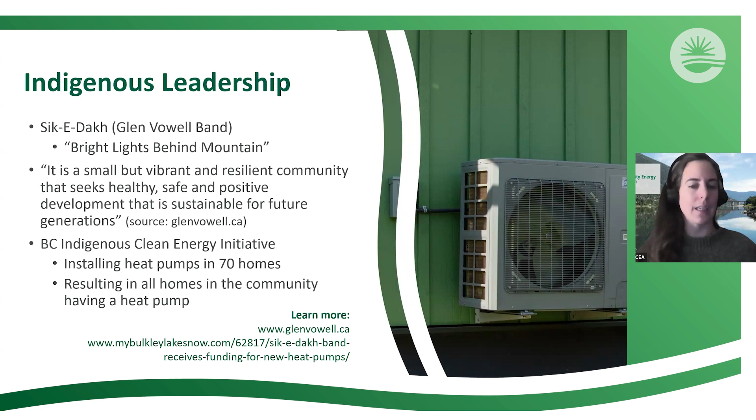The Sik-E-Dakh Band, also known as the Glen Vowell Band, received $300,000 in funding through the BC Indigenous Clean Energy Initiative to help improve the community's energy efficiency. They're using this funding to install heat pumps in 70 community homes, and with the completion of these installs, all 75 homes in the community will have a heat pump. If you'd like to learn more, you'll see at the bottom of the slide there a couple of different links that you can go to and read more about the project.

All right, for those of you who are joining us for the first time, welcome. The Community Energy Association, CEA, is a registered charity and nonprofit. We're committed to advancing bold climate and energy action by local government and Indigenous communities. We're proud to be the only nonprofit in BC dedicated exclusively to supporting these communities in their efforts to tackle climate and energy challenges. CEA recognizes that the built environment is a significant contributor to community greenhouse gas emissions. By addressing this sector, we can achieve meaningful emission reductions, strengthen community resilience and energy security, and enhance the comfort, health, and safety of our homes.

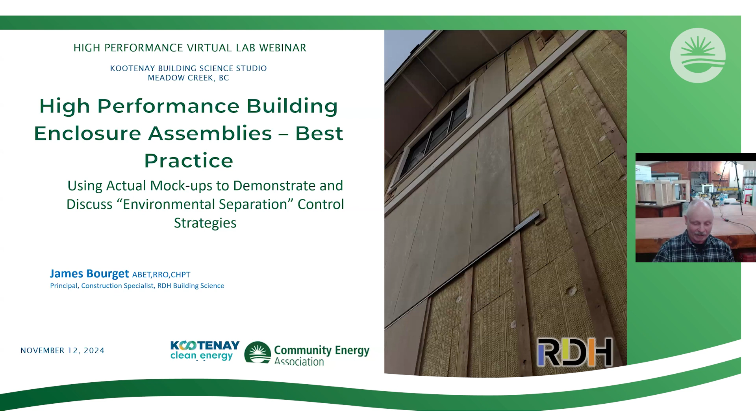Material being used for reference, continuing education and training purposes only. You need to make your own site-specific decisions and follow laws, codes, and regulations, etc. This is legalese blurb I have to put in front of the slides - you can read that. Seeing it here doesn't mean you go and do it. It means you could do it, but you need to know each site's own conditions.

This is going to talk about building science and the fundamentals. The agenda for today: I'm going to do a quick recap on building science fundamentals for those who did not come to part 1 - for those that came, it's just a refresher, and I'll breeze through it, kept it very light and simple. Then I'll talk about some environmental loads, mock-ups. We didn't get through the slides on below grade in part 1, so I'm going to blast through them. I went through the physical review of it, so this will be a nice recap, I believe.

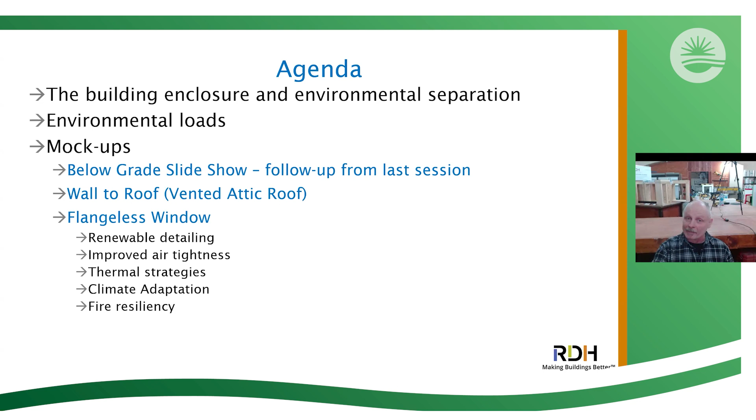Then I'm going to look at a wall-to-roof transition with a vented attic roof, using an exterior air barrier approach. How do you transfer the exterior air barrier to the attic when the air barrier in the attic is actually the vapor barrier - the poly - so it's air barrier by default? It's kind of a red herring and a bit of a problem. I'm going to show you unique ways of addressing that, quite simple. Then we're going to look at a flangeless window installation, high performance, no flanges - as we move forward, that'll be the way the industry is going to go. With all of these you get various renewable detailing aspects, improved air tightness, thermal strategies, climate adaptation, fire resiliency - all these things fall into place because we're going to start putting things in the proper location.

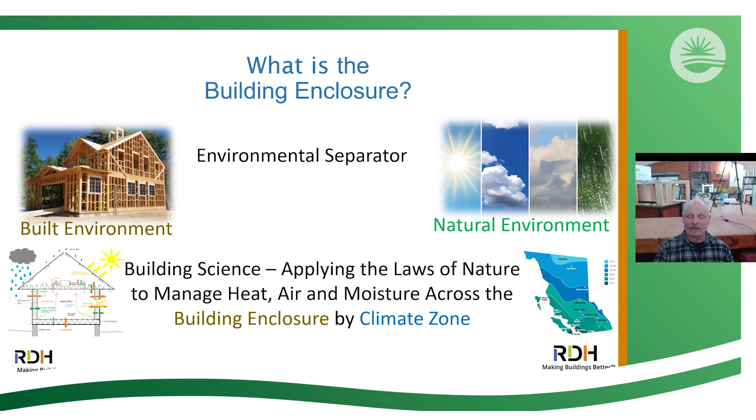So what is a building enclosure? It's an environmental separator - it separates the built environment, where you are, from the natural environment. Building science applies the laws of nature to manage heat, air, and moisture across the building enclosure, here by climate zone in our province, and we have different climate zones and different requirements. Here's a look at the climate zone map for British Columbia - you can see there are different environments, varying exterior environments, and you need to build accordingly. So the building enclosure just separates the inside from the outside.

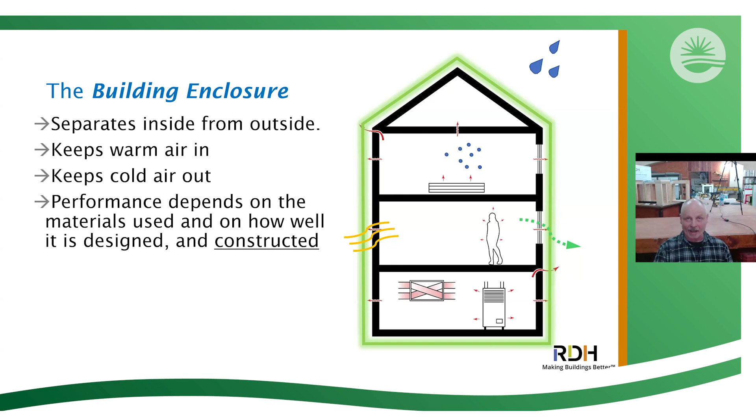It's really that simple - it keeps warm air in, keeps cold air out, or vice versa depending on summer or winter. But it really depends on how it's designed and how it's constructed. What we've done in the past is not necessarily suitable for the future.

Environmental loads are 5 critical barriers. The air barrier has a direct or indirect relationship with all the environmental loads. It's kind of like the king of the critical barriers, very important. Thermal has a relationship with 3 out of 4. Vapor deals with vapor, water deals with water. So at the end of the day, get the air tightness, then work on your thermal, then do your mechanical. Envelope first.

Traditional wall assembly here, you can see that there's a little bit of insulation on the outside, keeping the sheathing warm, but the vapor barrier goes on the warm side of the insulation, full stop, that's it. But it can also be the air barrier. In the past, we've been taping a poly and making it the air barrier by default. That's the only reason you tape the polys, because you're using it as an air barrier. If it's vapor barrier only, you do not need to tape your poly.

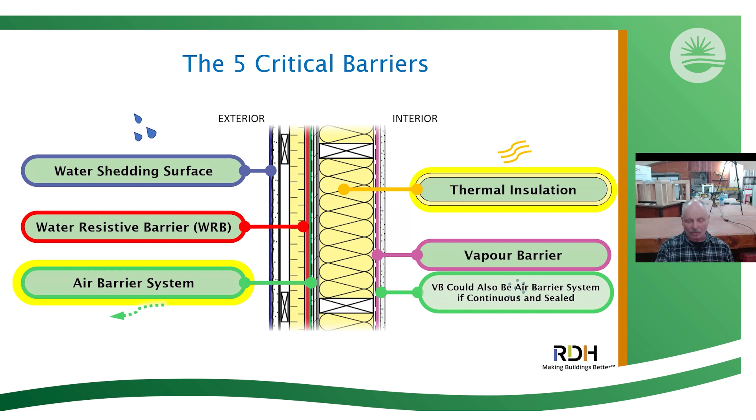It's a function of area covered. 95% covered, 95% effective. 100% covered, 100% effective. Vapor drive is one-dimensional. Air leakage is three-dimensional. Hence taping of an air barrier.

I look at nature, we should look at nature. Thermal performance by resilience in nature. Nature has a handle on all the climate zones. So how does nature stay warmer and how does your body stay warmer? Well, I asked everybody in the forest and they said, well, we kind of got this little inner layer of fat, subcutaneous layer, and some skin and some fur.

So we put some controls on the outside. I asked Buddy, he said, hell, it's cold out, I'll buy a ski jacket. That's it. Put the controls on the outside. You think to yourself, well, you put all the controls on the outside, how should your home stay warmer? It's organic, animals, humans, we're organic. How do you separate them? So from the inside, the outside, or both?

Well, this is off my property. There's a big black bear there, and he's walking up towards me, and I'm sitting there thinking about this wall. And my next class, and he says, well, what are you thinking? I said, well, I'm looking at this wall, and I'm thinking that if I took that insulation and it was like the subcutaneous layer of fat under the skin, and I took the plywood, which is the skin of the house, and I considered it the skin like on animals and humans and everything. Then I take the outside, the thermal and the cladding, and that'd be like the outside fur.

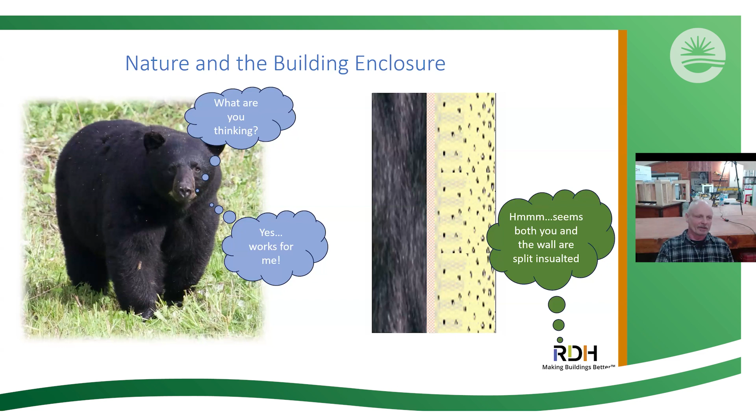It seems both you and the wall are split insulated. Well, that's right, and yeah, it works for me. And I make this tongue in cheek because the answers are so glaringly obvious. Stuffing a wall is habits of the past. Don't apply to the future, don't apply to high performance, not effectively, not without risk. If you build and follow the guide led by nature, you can build without risk, for assemblies that are highly durable with no failure mechanism.

More to that point, more interior insulation means colder sheathing. Colder sheathing means higher condensation risk. Means you need to have the ability to dry out. Many climate zones don't have rain screens, so how does it dry out? It's kind of like a snowball of trouble, and so we hope it works out. Hope's not a good play.

You look at the climate zones, you go up, it's just a little graphic to get your head wrapped around a little bit, saying, oh my. So the colder it gets in the climate zone, the colder the sheathing gets, the higher the condensation potential. Condensation from what? Well, from air leakage. Air leakage is never zero. And if it touches cold sheathing, that sheathing will be below dew point for your interior air. So it's going to get wet and damp. And can it dry out? Maybe. Is that the best way to build? No, I don't think so.

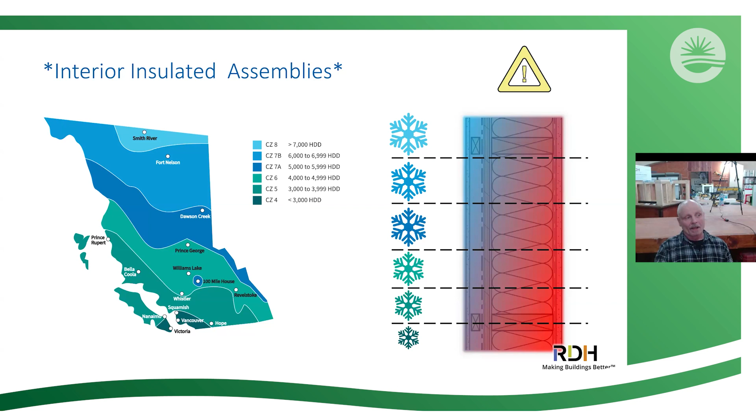Vinyl's a big barrier. You've got a big barrier on the inside and a big barrier on the outside. It's just a potential for issues. This is happening, and the problem with buildings is they fail over time, not right away. So people say, well, I never see a problem. Well, I do.

More exterior insulation means warmer sheathing. Think of it this way: summertime you wear a t-shirt, fall you wear a sweater, wintertime a jacket. As conditions change outside, you just put on a sweater, and the more fat of the sweater, the warmer you are. The skin is the plywood of a home. So the plywood's warm, and any air leakage or moisture won't condense because it's warm.

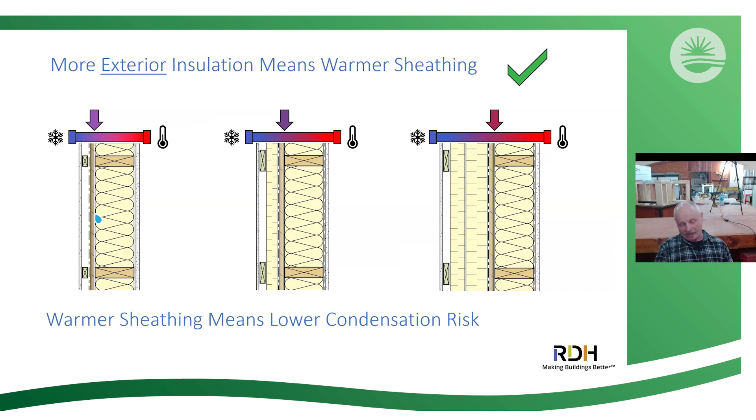To that point, if you take a -10 design temperature, like somewhere down on the coast, and apply no exterior insulation, just bats, the sheathing's sitting somewhere, and at -10 it's going to be really cold. So it's below dew point. Dew point for interior environments could be somewhere between 4 and 9 degrees, in the average range of human comfort per ASHRAE, which is 18 to 27 degrees and 30 to 55% humidity. But in that zone, 4 to 9 is a fair assumption.

So I put 1 inch on the outside. It warms up the sheathing, but it's still a bit light. I put 2 inches on the outside, now I'm sitting around 5.5 degrees. That's pretty good, but it depends on my interior environment—I could still get condensation.

Depending on the type of insulation I put there, I'd like it to be vapor open so that if I do get some wetting, it'll dry out. What if I put 4 inches on? Well, all of a sudden my chance of condensation in that sheathing is virtually zero. I have a wonderfully resilient wall assembly that's fire resistant, water penetration resistant, and has increased airtightness. All these wonderful things happen because we're starting to put the controls on the right side, like nature.

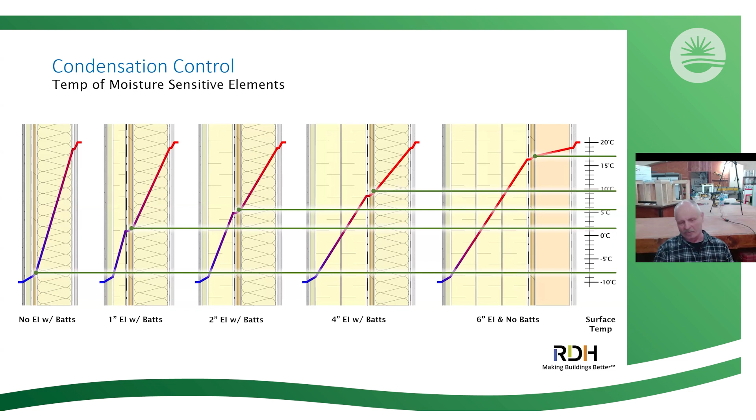Now, if I put all the insulation on the outside, the plywood's inside the building. You can go look at furniture from the 14th century at the museum because it's inside the building—well, your building is now inside the building. There's no failure mechanism for your wood frame. Everything you do going backwards from there increases your risk, to the point where we've been stuffing walls, and that's the most high-risk assembly you can build.

The below-grade air barriers—we talked about this and didn't get through the slides. What we typically use is sealed polyethylene over insulation, or if you've got radon, then you've got the radon mitigation underneath with airflow and different mitigation systems. But regardless, that's a typical approach below grade.

Some below-grade considerations we're going to look at: continuity of the controls. Thermal mass is a big one. You put the insulation on the outside, and all that concrete below grade is going to absorb heat. The insulation outside of that holds the heat into the concrete, and when you dial down the heat in the room, it gives it back to the room. It's a pretty simple concept, but we put poly and bat insulation on the inboard side and disregard that thermal mass. That'd be like building a fireplace or a barbecue and not putting any thermal mass around it—kind of silly.

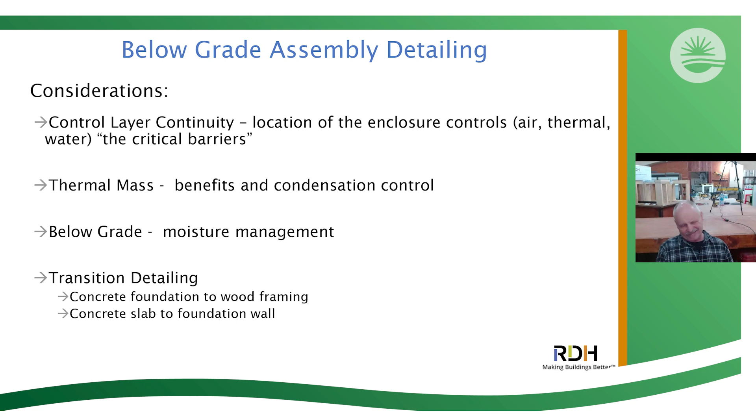We'll look at some transition detailing. This is the below-grade assembly mock-up. I didn't take you through the slides yet, so I'll go through them now since we've already talked about it. There's a waterproofing or damp-proofing required, that's on the concrete. Each sentence will be followed by a green arrow so you can follow along—that's how I set this up for you.

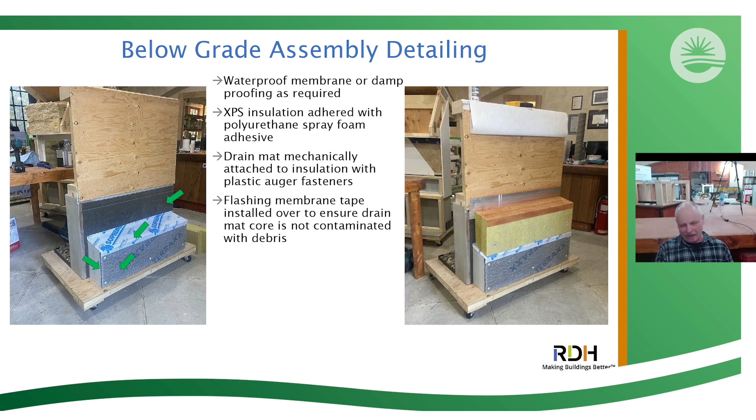XPS adhered with polyurethane spray foam, so you can glue that to the membrane—that's quite common, right there. Drain mat mechanically attached, right there, attached right to the foam, and I'll explain that in the next slide. Flashing membrane tape over the drain mat ensures its core is not contaminated by debris behind it, and the rest. So you can see that that's working.

I've got a self-adhered membrane transition from below grade to above grade, where the concrete turns into framing. So I have a self-adhered membrane connecting the concrete to the framing, and then I transfer the exterior air barrier into that concept.

Below grade mineral wool, this is a fire rated assembly. I have simulated 2 feet of mineral wool below grade because I've seen on burnt sites where people have lost homes and cabins because the ground actually drops significantly when the biomass becomes a peat fire. So you're protected for 2 feet below grade also. Then the XPS starts down below that.

Prime the mineral wool. You can use an aerosolized peel stick primer, spray the mineral wool, and it becomes hard and crunchy and easy to put membrane on. Otherwise, it's like putting Scotch tape on a cat - it doesn't stick so good, it's all fuzzy and it doesn't work. Now it works fine. So this is how I stick on the insulation.

I can also adhere the mineral wool this way - same kind of thing for roofing, adhered roofing systems. Well, this is just a vertical wall, adhered wall system. So I use a polyurethane spray foam adhesive.

Drain mat, you can buy drain mat augers. They screw right into the insulation and hold extremely well. You can use a rock slinger, backfill, do whatever you want. It makes a wonderful drain mat attachment.

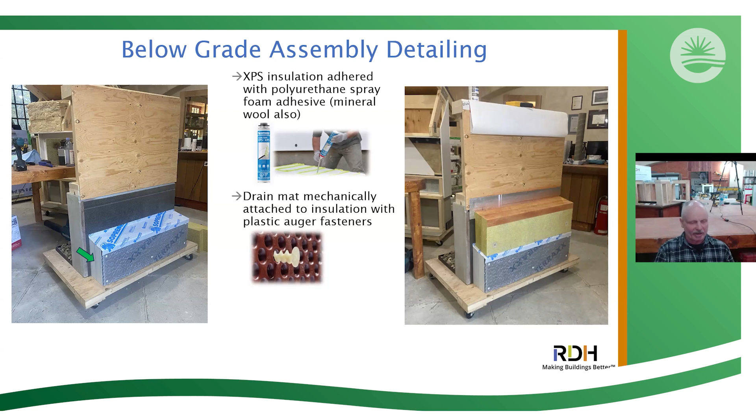And then primer, I just spray the Elastocol primer on there and it becomes crunchy, or it could be a Henry's primer. I don't care whose primer it is for the peel stick you're using.

So the below grade assembly detailing, flashing membrane tape installed - this is to direct moisture out of the assembly. That's part of the code requirement, that if water can get to the structure, you need a means to dissipate it to the exterior. I'll tell you right now, when you exterior insulate, no water's getting to the structure. However, we have to follow along for the time being because the requirements and the building code are not perfectly harmonious at this time. I could share some stories of testing, but in the meantime, it's simple enough to follow along.

So the sheathing membrane laps over and is taped to the self-adhered membrane, right here - it's shingled. That's what's required in the building code, that it be shingled at least 50 millimeters, 2 inches. Okay, that's what we've done, so water would drain outward.

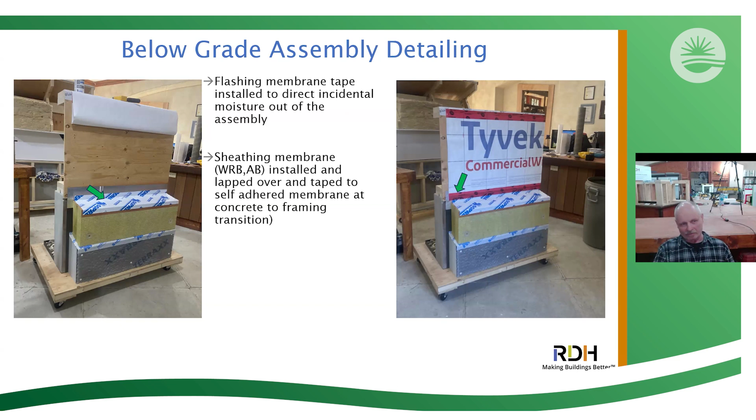That's nice. So now here I've got an EPDM gasket for an electrical box I threw in a wall for fun, sitting right here. That's the electrical penetration detailing.

The funny thing about electrical boxes is they're 2 inches, well, rain screen is 3/4 and cladding is usually 1.5 inches, so I need to recess the box 1/2 inch. I simply trace the box on the insulation, take the plug out, slice a 1/2 inch off it, put the plug back in, and put a little plywood plate that screws into the wall assembly. Then I attach the box to that plywood receiver, and the plywood receiver terminates a 1/2 inch shy of the finished plane of the insulation - you can see it fits the box perfectly.

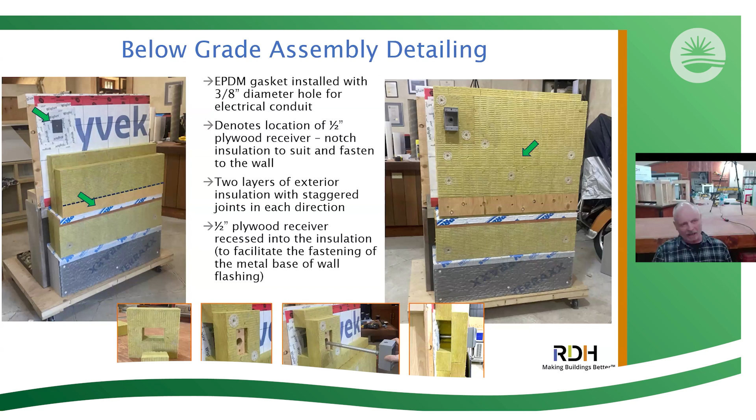So that's a 1/2 inch notch in the insulation to receive a plywood receiver, seen on the right-hand side, with 2 layers of staggered insulation in each direction, and a 1/2 inch plywood receiver. The receiver is there because you've got flashings and metals - it's very challenging to fasten the back leg of metal through the insulation. You can't put the metal on the plywood because then you've got a thermal bridge, and if you fasten through the insulation, you're going through the air barrier. Many times you have to make adjustments, but you can't take those screws out. So if you put a receiver plywood fastened through the air barrier, you make the compression seal and it never comes off - it stays. Now you can play games with your flashing with short screws that never penetrate the air barrier.

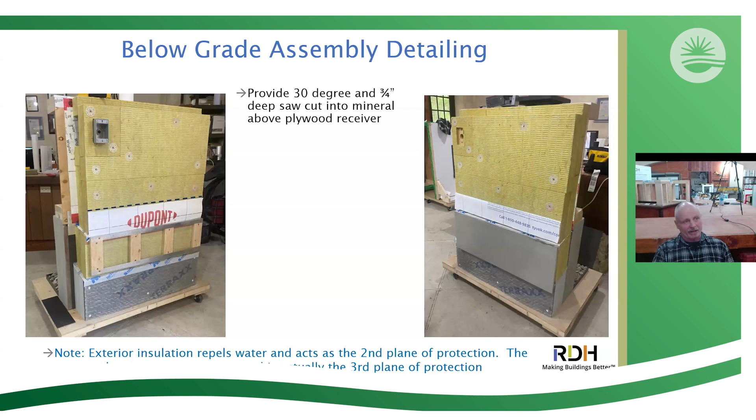So here I ran my cordless Skil saw along the plywood, I cut a 30-degree, 3/4 inch deep cut in the mineral wool above the plywood, right there. I installed sheathing membrane and tucked it into that saw cut, so it's shingled. One of the things you have to understand is this mineral wool is hydrophobic.

Water will run down, so now it just runs off. I just tucked it inside there. Very simple to do—just different ways of looking at things.

3/4 by 3 inch PT strapping installed for the cement board base right here. Cement board or parging installed here. It could be parged after, whatever.

Now you get to this point here. You've got a base wall flashing. You see the base wall flashing has a little cut right here, right? Well, that tucks into that reglet right here, just like the Tyvek did. So it becomes a shingle.

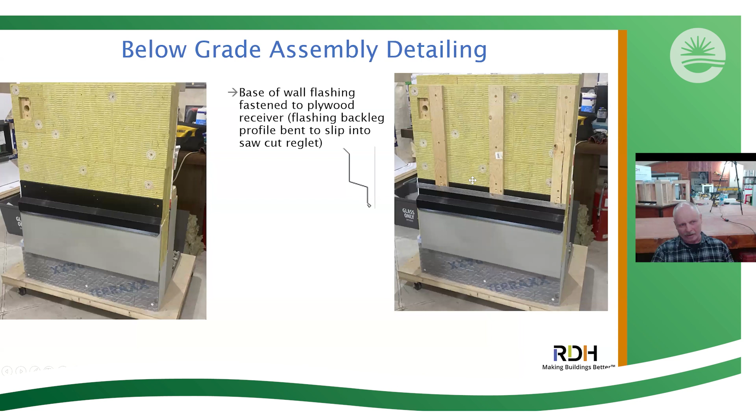This is incredibly simple to do and highly effective. I can pour water here all day long and no water will ever get behind anything. And so now I've got that done right there. Install perforated metal insect screening strapping right here.

So cladding installed, electrical trim. There's the electrical box that we had that was set into insulation. I have a trim that's got a notch in the backside to slip the Hardie in behind. It's completely serviceable—I can remove the trim, I can remove the box, I can do whatever I want with that electrical.

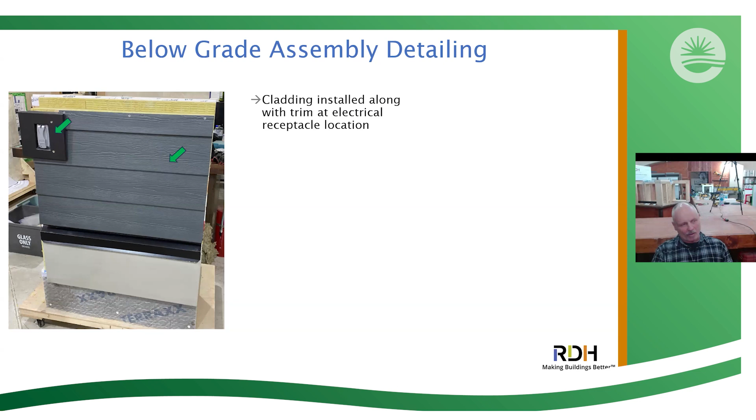Look at behind there. So here's a below-grade detailing. I'm looking from the backside. I say, okay, well, I got some batt insulation. Yeah, that's cool.

Remember, I got insulation on the front side of the concrete. I also got insulation on the front side of the wall and inside the wall. I got a structural tie-down shown right here. These are Simpson tension tie-downs. You attach it into a double stud. Quite simple to do and doesn't interfere.

One of the things we see is typical tie-down straps that are not conducive to exterior air barrier applications. And shazam—you look at this and go, what the heck, what am I supposed to do with this? Okay, it doesn't work. You can do tie-downs—I've done numerous buildings just using tie-downs. Unfortunately, the industry and structural engineering has this wonderful cookie-cutter approach that gives them the answer for how many of these tie-downs or strap tie-downs you can get. Well, ask them to figure out how many tension ties so that you have uninterrupted ability to put an exterior air barrier onto your building.

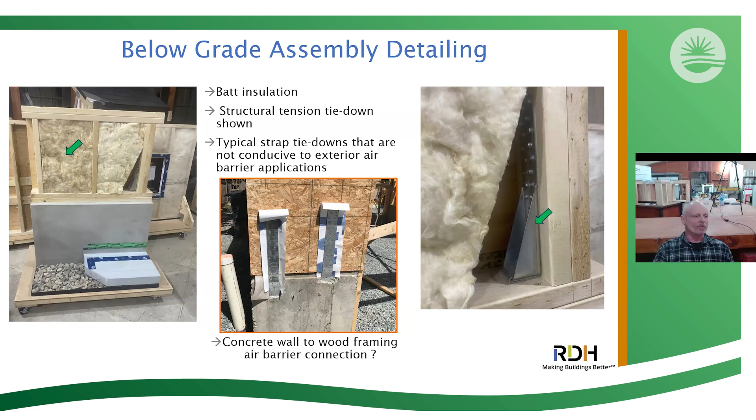Okay, concrete wall to wood framing air barrier connection? I don't think so. All right, so you look at the inside here, the XPS insulation with poly.

Right there, that's what we're going to talk about. So I got a poly pre-strip. I use plate poly around the perimeter of a garage or basement or whatever it might be. I do the perimeter and then I put a piece in the field. It's really hard to figure out the rebates and everything and put all this poly in and make it nice, but it's easy to strip it and put it back on top. It is part of your air barrier system.

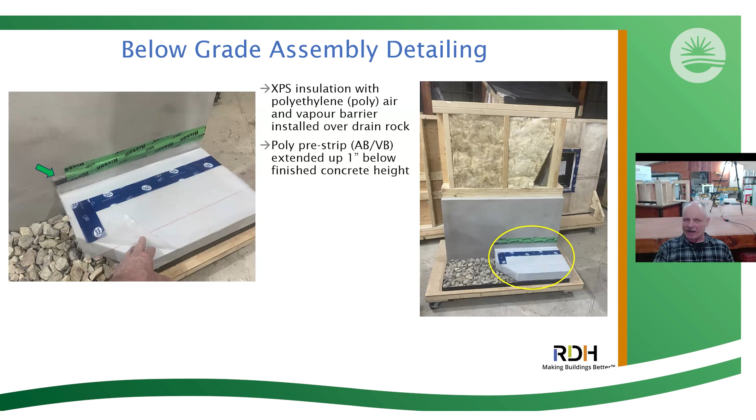So I'm going to pre-strip the poly, extend 1 inch below the finished concrete height. So I know where the concrete goes, I can snap a line there—that's where the concrete is. I'll bring the poly up to 1 inch within that line. And there's a reason for that.

So I'm going to set the poly in the acoustic seal, and I'm going to put that 1 inch below onto the poly right there. Then I'm going to install high performance air seal tape onto the concrete foundation and terminate at the height of the finished concrete pour. That's right here.

So you already snapped the line, you know where it was—you put the tape there. Before all of this takes place, you power wash the concrete into the gravel and do your work. This tape bonds—now bring your best fingernail to the party, okay? You can't get it off. The best part is that when you pour the concrete, you don't interfere with any of the air barrier because that's the height of the concrete.

So here's the poly field sheet, right here. And that's taped to the pre-strip—that's the blue tape, okay? And so you can see the red line indicating the extent of the pre-strip. I taped the field onto it.

So below-grade assembly, I got poly with gypsum right here, typical inside condition. I got concrete slab poured to the height of the air seal tape. So you can see on the right-hand side, concrete's poured to the height of the air seal tape. So when you're troweling it, you're not cutting any air seal or connection to the concrete, but you're transferring that air barrier right through the concrete to the membrane or damp proofing that's on the outside and up the outside of the building, okay?

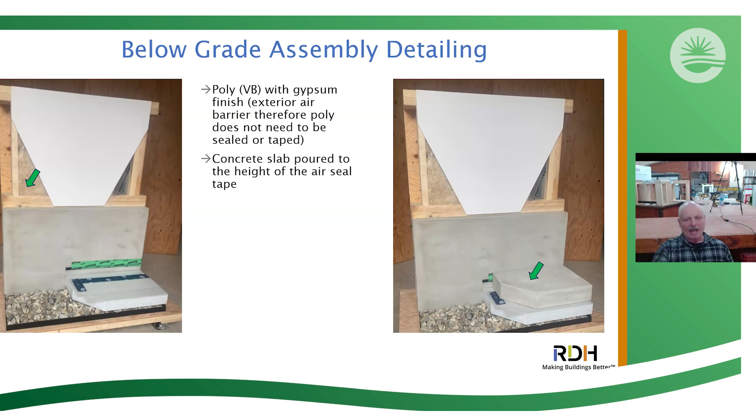So sometimes you got ICF. You can extend the poly onto the shoulder, and carry it through the concrete and up the front side of the waterproofing. That's one strategy you could do.

If you have the slab higher up and you can't go down the shoulder, because that doesn't really work, you can bring it up this way, put a vapor-open membrane on the foam on the inside so that water in the concrete can still dry out to the interior, depending on what membrane you have to the exterior, above grade. But you can make your air connection at the top of the ICF if you change to wood frame.

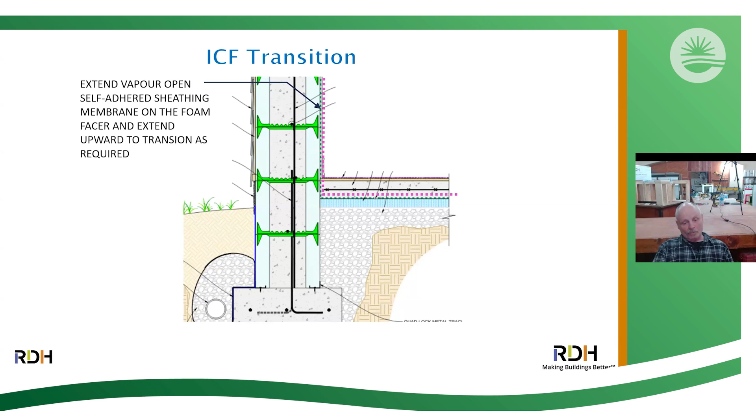So that was the below grade. I wanted to catch up with you on that, I know we looked at that last time. We did have a couple questions come through there, James.

Someone just asked for your thoughts on spray foam in unvented roof space. Spray foam in unvented roof space, you mean on the underside of the sheathing, I trust. I find that, for one, it's a highly risky assembly.

I can tell you straight up that on many jobs I've looked at, one thing you have to understand: roofs leak. And if you have spray foam on the underside, you may not know it's leaking. Best thing you can do is know your roof's leaking. What I found on many projects is structural damage, because water is migrating into that upper framing and chords of your roof assembly, could be joists, whatever, and it rots. You don't even know it because it doesn't make its way through.

So I find that when I'm designing or have to do a project, I put my thermal control on the outside. I follow the cue given by nature. It just makes total sense, both for the laws of physics and the fact that everything is highly visible. The structure itself, with thermal controls on the outside, will survive roof leaks, etc. That's why it's okay if roof water comes through your light fixture, you know the roof's leaking. That's minor. Structural damage is a big ticket.

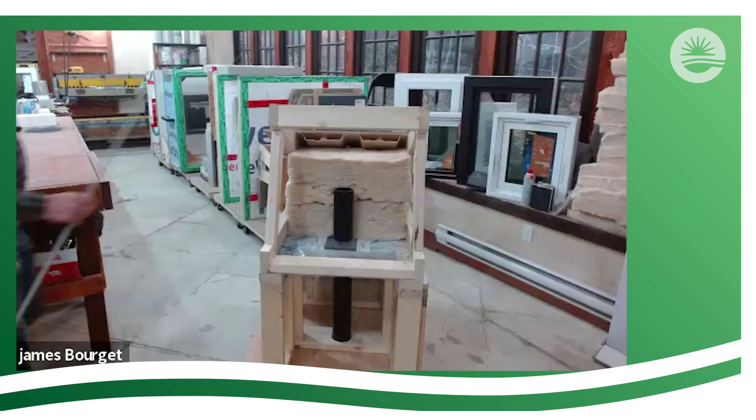I'm going to look at a roof to wall installation as built. So what I'm going to do is take you over and we're going to look at that mock-up, which is this one right here on the right-hand side. It's fully built, and I have that on camera right here. So I'm going to move on over there. This is the mock-up that you saw on that slide.

Which is a vented roof assembly right here, with the rain screen wall assembly. It's got Hardie cladding, 3/4 inch strapping, and 6 inches of mineral wool on the outside. Now, this is a 2x4 wall assembly. That's all you really need to build with.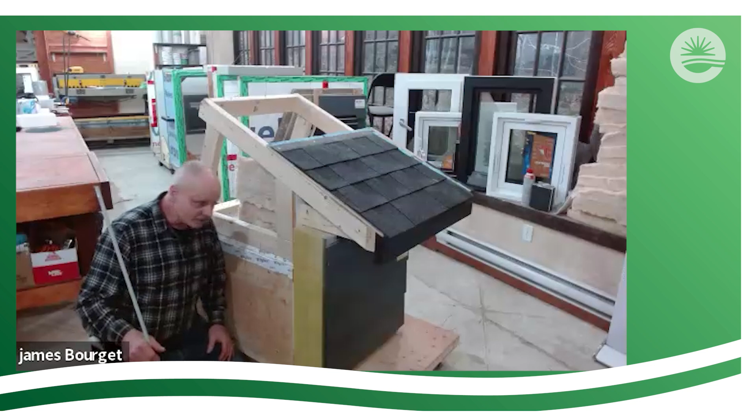A 2x6 was a function of the old R16, not so much a function of what you need to build generally. With 6 inches on the outside, I've got an R24 continuous insulation on the outside, another 10 on the inside, an R34, throw a couple air films and components in there, it's easily an R35 wall assembly. This would satisfy most climate zones and energy types. It's really quite simple.

A 2x4 wall, we know how to build them. 2 layers of mineral wool is quite simple to put on. I'm going to talk about that, and we're going to look at some of the air barrier strategies also. We're going to spin this around.

We'll talk about it for a moment. Then I've got some slides. Then I've got another mock-up here where the bottom half with the ceiling plane I have built, but I don't have the roof on it, so we can get a little bit more clarity taking place. You can see the insulation baffles and the rest of it in here. I'm going to take the insulation out. We get down to the ceiling plane.

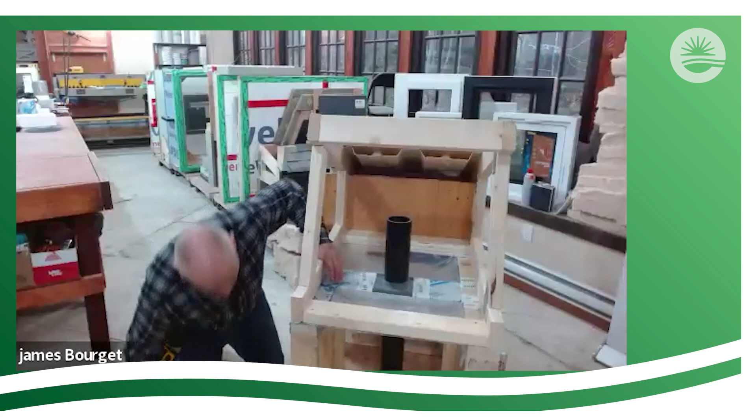And what we're talking about is on the wall itself, I have an exterior air barrier. You can see right here. This exterior air barrier carries up and travels across the plates this way. This piece of membrane hanging down here, that's a water-resistant barrier. It's simply there for water, not air.

The plane of the air transfer goes from the Tyvek to the plate, over to the polyethylene on the inside. Sorry, I have a problem here. Get rid of my phone, sorry.

So I talked about the air barrier, but here's where it connects to the poly on the inside. As you can see, the tape came across and transfers here. What do you think? There's a piece of tape right here and then some wood.

Well, wood is part of your air barrier. You can't blow air through a 2x4. You can't blow it through a 2x6, 2x10, 2x8, 2x nothing. So it can be used as part of your air barrier. If you seal the joints of the lumber, it can be part of your air barrier system. So what we've done is carried that across.

And you can look on the inboard side, which I'm going to take you in, and we'll switch over to a little mobile camera.

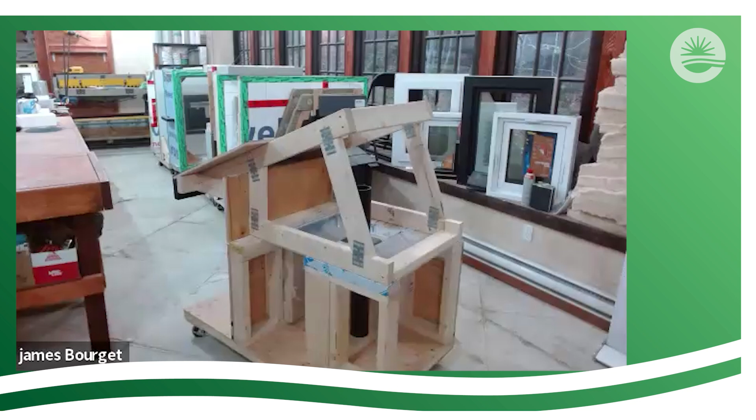Gotta take you for a little ride here.

So you can see on the inboard side that the air barrier comes across and transfers right here. There's acoustic seal, right there. That acoustic seal connects to that top plate. That top plate is connected to the tape on the outside. So the tie that comes up connects to the air seal tape receiver, transfers through the wood to the acoustic seal, which then connects to the ceiling poly. The interesting thing about the ceiling poly is I actually measure it.

Poly never gets measured, doesn't get a lot of attention on site. Usually it just gets kicked around and stapled all to pieces. But it's actually a very important component of your air barrier. You measure the room, add 6 inches, staple it on the top plate, and let it hang down to the bottom plate. I do my perimeter, and then the ceiling falls into place by default. When I do that, it makes really interesting cones in the corner.

When I staple it, I only staple it to the top plate. I leave the bottom plate unstapled so I can lift it up and stick my acoustic seal underneath it and pat it back down so I don't get all mucky, right? And so you look at the other side.

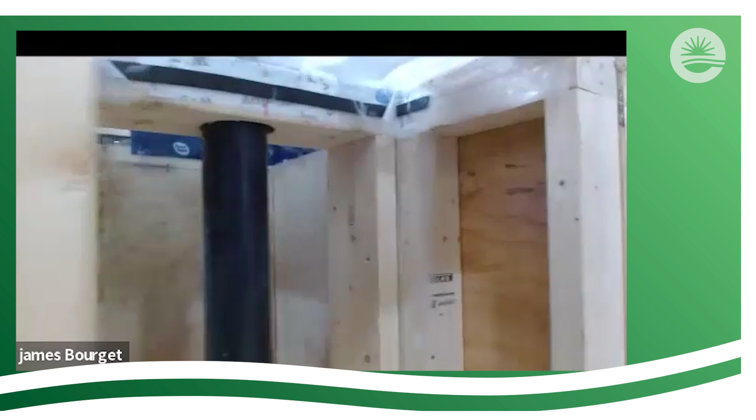You can see where I don't have the tape on top. Now I'm just going to back you off a little bit here. Okay, and so when you do this way, you make these nice little cones right here.

Well, when you do the acoustic seal, you put it behind so I can lift up my flap, stick my nozzle. I've sealed it in, but I can go underneath here. I can run my acoustic seal, pat it into it. I take the nozzle, put it inside the cone, and then I can staple it square in the corner.

See, when you do this properly, you automatically get these little cones in the corner. And so you don't get this balled up poly and all these areas where you're trying to make an air barrier transfer from the outside to the inside, and it's just a tinted mess. This is an organized install.

This wall poly that I've notched right here will go back onto the wall after it's stapled and done, like so. This is simply vapor control. It only needs to be lapped, that's it. This is air control, which takes you across your ceiling plane.

Now, how do you get from one room to the next room, and how do you deal with a service penetration? That's what I'm going to look at now. So I'm going to switch back to the other camera.

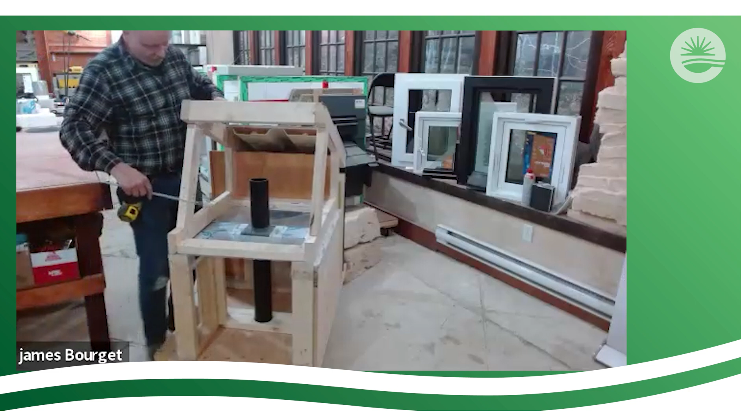And we're going to look at the top side. So on the top side, you can see something that those familiar with this might go, what the heck is that? Well, I got the membrane on top of the plates out here. So what is this that I've done right here?

Normally when you frame, you have this poly between the plates, right? And it gets done during the framing process, and it might be done nicely, it might not be done nicely, might be sticking out, hanging out, cut off, etc. But it's critical. It's actually the transfer of the air barrier from one room to the next room, and so it has to be connected.

Well, how do you connect it at its intersection? When you've got flaps going this way, you've got a vertical transition poly going this way, and you've got three-dimensional air control you have to manage at that pocket intersection interface. Well, it doesn't get managed well. And so there's an easy way to work around that.

We're good. And so I put the membranes on the top. This here, what I have on top, is basically a self-adhered poly, and it's got texture and grip. You can ride on it, and even if you damage or scrape your cords on it, or roofing, because it's self-adhered, it's still airtight because it's glued. The wood bridge is airtight, so it becomes highly resilient.

I have a service wall, and I've got to put a service penetration wall, and so I can pull a hole.

I put an EPDM gasket, which I sized for my pipe, and tape it to my self-adhered poly because it's right here in my face. I got no hidden components or kind of sheet spray foam in. When the poly goes between the plates, you got to try to seal that poly in a hole.

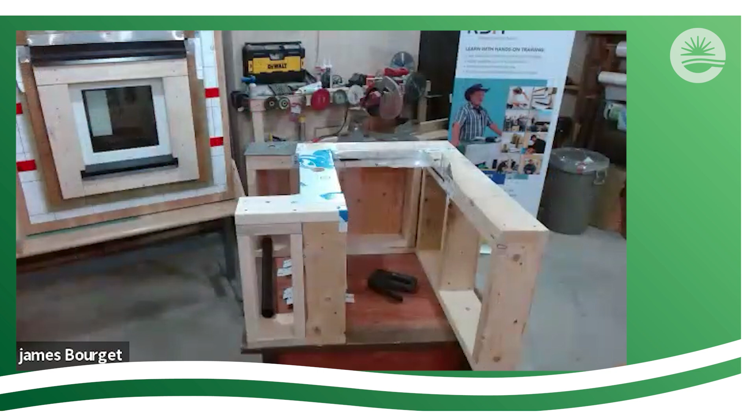Okay, so this is the lower half of what I was talking about, which you can't see with all the trusses and everything on there. But now you can see what's happening. Here is the poly vapor control for the partition wall interface. This is the solid membrane on top of the plate, which runs down through the joint between the top plate and bottom plate.

You can see the acoustic seal that I've installed here because I put part of the ceiling poly on. You can see the little cone in the corner. Poly comes down to the bottom of the plate, and it's stapled only in the top plate.

So when I'm done, I'll run the blue tape across all the staples on the top so I don't have any holes in my air barrier. And at the same time, the wall poly just simply comes up and laps onto it because it has nothing to do with the air control. It's only vapor control. This whole concept of taping the wall poly is not required. Okay, waste of tape, waste of time.

So you look at the service penetration. So I have this on top of here. We can have gussets here, here, across my pocket. I have a gusset going down right here, and I'll bring a camera over and you can look at that. I'll get a service penetration right here into my service wall.

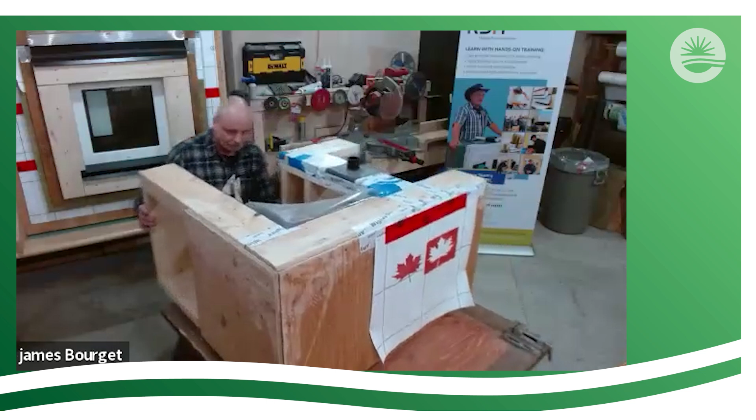And visible, I have an uplift plate. You can see here, so my uplift plate is stopped in the wall. I simply put a larger piece of tape to cover the entire plate. So my air barrier transfers to the wood, transfers to here, can't leak behind the plate because the entire thing's sealed, okay, all the way around. I just carry the acoustic seal through.

So what did I have to do that was difficult? I put a piece of tape, that's it. Now I can deal with these. So all of this is quite easy to deduce, and it's right in your face.

Putting on a corner, you get a gusset right here, okay, this is just a little corner cap. Not just cut it, fold it, simple. It's all here, really easy, nice stuff to work with. Okay, there's a couple of types.

One here is called Sopra Seal Stick Flash Pro. Soprema also makes an air vapor barrier top membrane, which is great, which is another type like so.

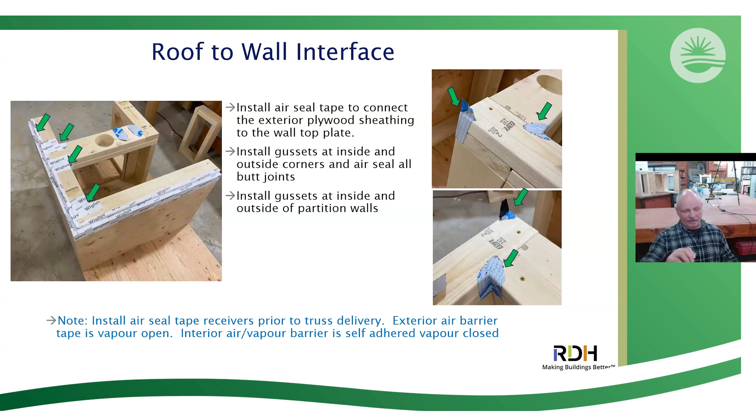On the partition walls, same thing - inside and outside corners, gussets, 4.5 inches long, cut a little V because I'm going to bend it over, so I don't need the corners, just unnecessary stress. I cut the corners off and bend it around. So you look at this here now, roof to wall interface. You can see now that the top plates, including the partition walls, are monolithic. Okay, that works out lovely.

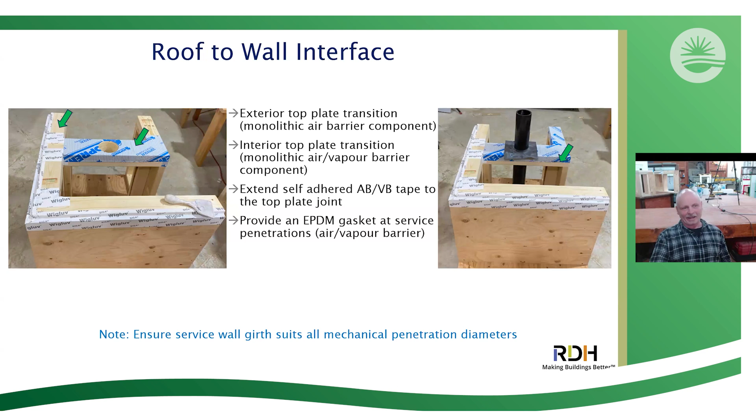Interior top plate transition, self-adhered, no problem. Extend it - it's self-adhered membrane right here down to the top plate joint. Okay, so like I said, 9-inch roll goes perfectly on 2x6 frame, and they make different widths of rolls or whatever, just grab the one that works. Okay, provide an EPDM gasket for the penetrations, simple.

You look at that now and you say, okay, well, staple the perimeter and tape it just like I did live on the thing there. It takes but a moment. You can leave it on the pipe anytime, they can continue with the mechanical work. And if you don't have time to do the air seal work right now, you just come pull the gasket down later and tape it out. No big deal. You can do all your fire control for the underside, whatever. So you seal and perimeter that.

Roof truss is installed - this is what you should see when you drive the site. And this is something I don't see very often. I see sometimes Tyvek flaps sticking out or all kinds of neat stuff sticking out, and theoretically that can work to transfer that air barrier across, but how do you fix it if it shears off? I've seen where the Tyvek is torn, discontinuous, the corners aren't sealed - they just come in two different direction laps, but they're not sealed. So if you run the receiver tape, there's nothing to tear off or shear, and you just tape to that tape. That was the approach I'm showing you.

Okay, that's right there - that's an air barrier receiver. You can see here, depending on what your overhang framing is or whatever it might be, you put a water resistant barrier down. That is just lapped - it's not taped, it's not part of the air barrier because the air barrier came up and across the ceiling plane. Everything above the ceiling plane, which might be in your heels, is simply a water barrier. Okay, doesn't need to be taped.

Blocking installed to prevent venting into the roof space right here with the strap. So you've got to vent your walls out, not into the roof. And perforated insect screen to provide for insect prevention and forward venting.

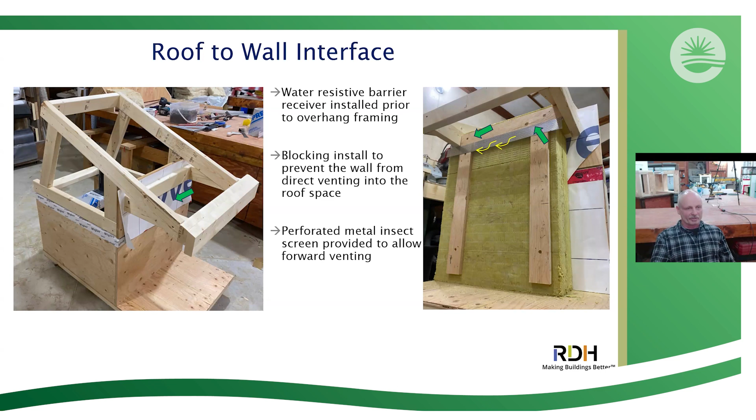It works really, really well, and it's a simple brake shape. Any roofing or sheet metal shop can brake these pieces. Comes in a 4x10 sheet. Slit it, break it, good to go. I do it here in my shop.

Air barrier transition to the top of the wall, tape to the tape approach. That's what I talked about. See, this one above on the heel, I cut it off so you can see the plywood. It's only lapped over, that's all it needs to be. Quite simple, so you start looking at this here.

So here's a view to the underside as we start to build this roof to wall transition. We've got the air barrier stuff done now. Now we're working on our thermal, which is continuous up. So the wall carries right up through to the same height of the batt, so you're thermally continuous across that transition. You don't stop the wall at the plate and stop the batt here, so it's not continuous. No, the thermal plane must be continuous through the assembly.

So view of the soffit channels shown right there. I didn't show the soffit, obviously you wouldn't be able to see anything. And then insulation baffles as required, I showed you that. Cladding installed.

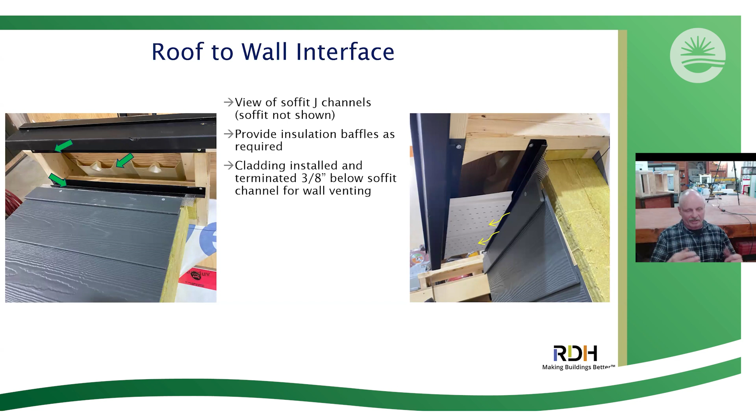Here's the interesting part. So this baffle that's right here, this cladding stops 3/8 of an inch down, so this can vent out forward. So you get this neat little perforated line across the top of your wall. It looks nice, and it's highly effective for the venting, and you're sending out warm, humid air potentially because the walls get warm, the ground can be wet, and you send it out so it can temper before it goes back up and maybe enters into your roof space, reducing the chance for condensation, mold, etc.

All right, so an optional approach you can do is put a baffle board on, you change your blocking, put a baffle board on, so you can hide the vent strip, and it would be something like this. Well, now you don't see it. I got a baffle board in front of it just by changing my blocking arrangement. So this is looking from the backside.

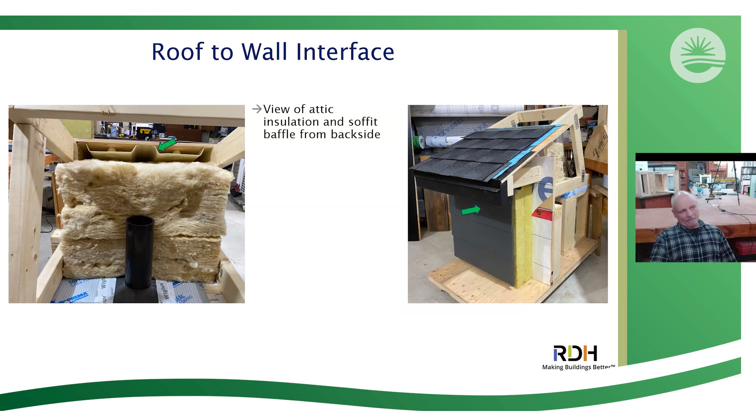No, I did not terminate the pipe in the roof space, just to clarify that again. All right, this is just a layered assembly. It's an attic insulation and soffit baffle from the backside, just showing what's happening. And it's just an overall view of the split insulated wall and slope roof assembly.

Air and vapor poly, like I measured the room. If I got a 10-foot room, I cut the poly 10'6". Yeah, I lay it out, I use a T-square, I cut it, and I put it around my perimeter, and the ceiling automatically falls into place. This idea of you've got to rib down the middle and make some kind of bass drum ends up with tented corners all the time that the drywallers managed to ruin, and that was actually your air barrier.

So by default, when you have a vented attic, set the perimeter square and true with the cones and everything else like that, and the drywall will have nothing but square corners to work with, and they'll provide an enhanced compression seal, and you'll get better airtightness, instead of cutting it, ramming the board in, or whatever magic takes place on site. Sitting on installed drywall, I know exactly what magic takes place on site.

Put the pookie in there, and I can pat it down, and I don't have to get it all over me. I got this protective shield, it's like wearing a face mask for that pookie stuff, okay, because it's nasty, right?

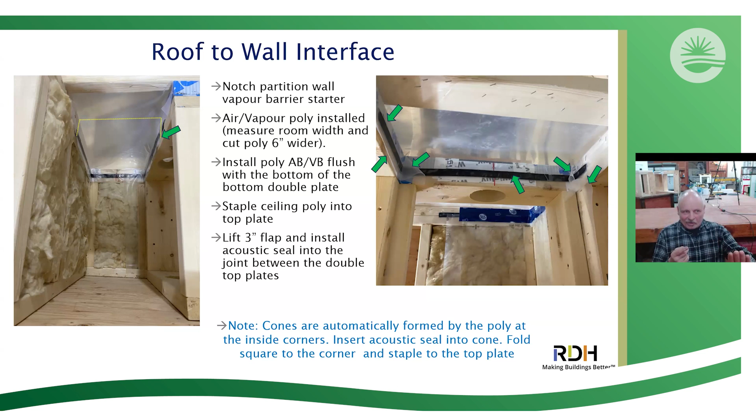What you do is insert the nozzle in there, shoot a little acoustic seal, take the nozzle out, push it square to the corner, and pop a staple into it.

As I come along here, I install poly vapor barrier over the wall in a lap manner. I don't need tape seal, I don't need any taping on my wall. My air barrier is on the outside.

Extend to the joint between the top plates and staple to the bottom plate. So I bring it up to the joint. Everything goes to the joint. Bring the top ceiling down to here, acoustic seal transfers here, bring the bottom up to the joint, and then run air barrier tape over all the staples I put in the top, which also holds my wall poly down. So all of a sudden, I have no fastener, nothing in my air barrier. Everything's concealed and airtight. That's the roof to wall interface in a nutshell.

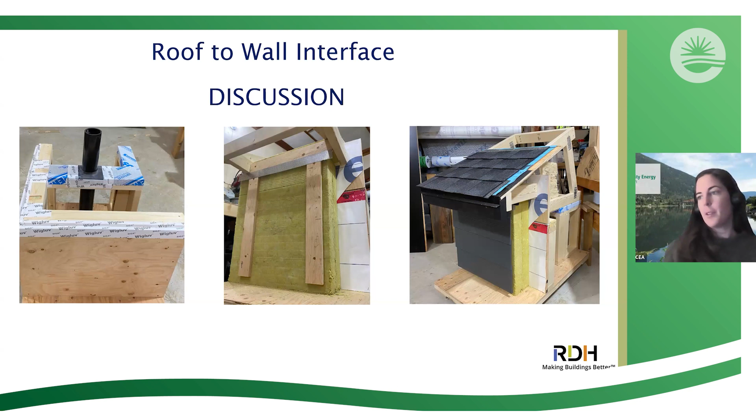Someone asked, how would you seal an exterior wall beam pocket? Exterior wall beam pocket, yes.

At the air barrier there, you have two options. Believe it or not, you can make EPDM gaskets for square beams, if you have a perimeter around it to put one on. If you don't, you can simply use tapes. If you saw session 1, you saw the balcony program, you saw how I taped around a joist. You can imagine, would it matter if it was square or rectangle? It doesn't matter.

So I can make a gasket out of EPDM for a beam if I have a place to put it. The trick is to measure the beam size, shrink it by 1 inch all the way around so you get 1/2 inch returns, and trace it onto your EPDM. You then take your 1/8 leather punch or 1/8 drill bit and put a drill hole in each of the 4 corners so you get a slight radius to your corner, so when you cut it out the rubber doesn't shear. Then when you put it on, you'll get this 1/2 inch return.

Because it's a beam, you can run a piece of tape, and the beam's never coming out, it's permanent. You run a piece of high performance tape all the way around that beam to seal that rubber to the beam and to the wall, and it's highly airtight. Or you can just use tape. I hope that answers it.

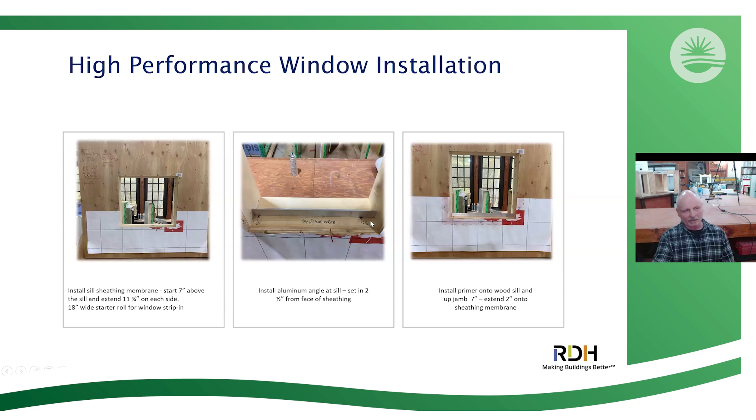So I've got a pocket left and a pocket right. How do you make those? Well, it's 4 inches wide because the minimum lap is 2 inches. So I cut a 4x4 by the length of my roll for my detail. In this case, 6.5 inch, depending where your angle is - the angle counts for 2. I put a 2.5 inch recess and 2 inches over, 6.5 total. Depending on your project, you have to figure what width of roll you need to make this work.

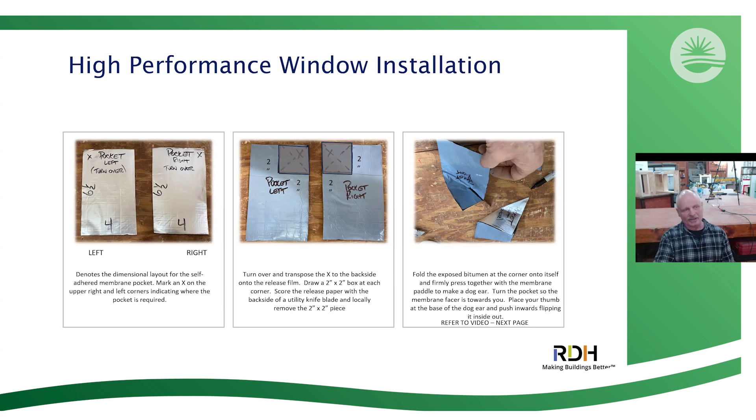You want to minimize the amount of peel stick on the wrong side of your wall assembly, so 2 inches is the minimum requirement. To make a pocket, cut out the release on the backside and fold it into a pocket. How does that actually take place?

What I can do is go to the table. And then I'm going to walk up to that table there and try to show you, okay? How did I get in two places at one time? That's weird.

Okay, so I put the X, that's my left pocket, and I take the Olfa knife, and I've got to cut that release and remove it without cutting the membrane. So I take the knife and flip it upside down, and I do what's called scoring - this is a standard technique that roofers use all the time for self-adhered membranes or self-adhered roofing plies, etc. You score the backside of the release paper.

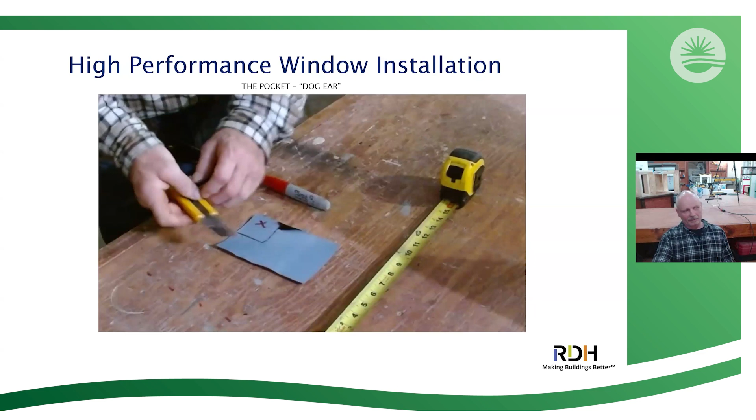All right, super. Put the knife away so you don't stab yourself. Then just take the release paper off the backside, and you won't cut through the membrane. If you do cut through the membrane, you need to chill out, because you're using the back of the knife.

Now fold it together like so, and press it down. Use your paddle - this is an easy tuck paddle, best peel stick tool ever. I paddle it down and make what's called a dog ear.

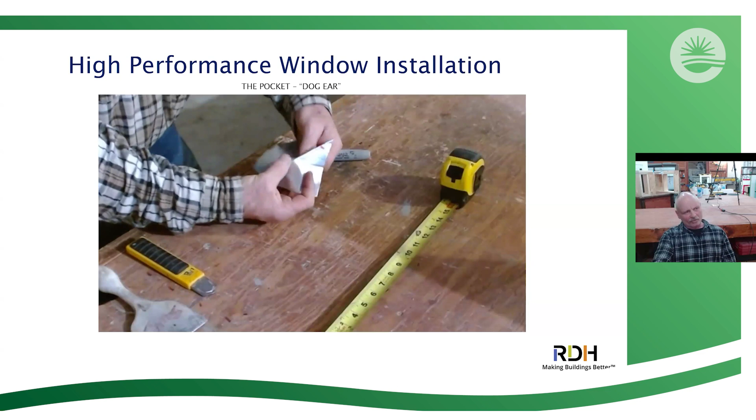And so now I got to take the dog ear and make it inside out. Put my thumb at the bottom of the ear and flip it inside out. And so now I've got an X, Y, and Z axis with no cuts in the membrane. So it's 100% watertight, it's going to be 100% airtight.

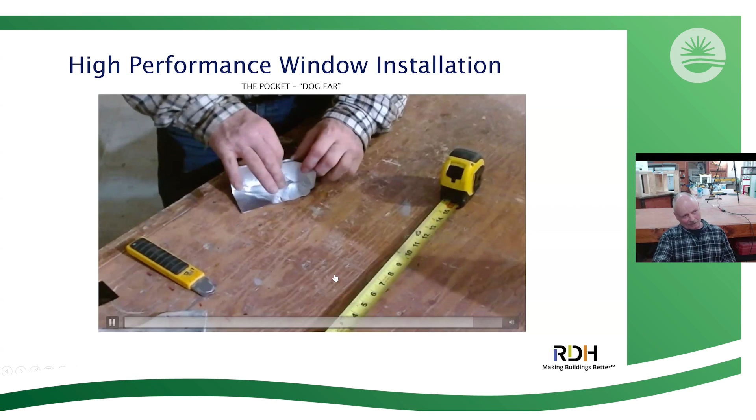And the dog ear goes against the jamb side. So there's an expression I use called dog licks the jam. You can make toast and check it out yourself, okay? So the dog licks the jam, okay? There you go. And so now you've got a pocket that will fit in that inside corner.

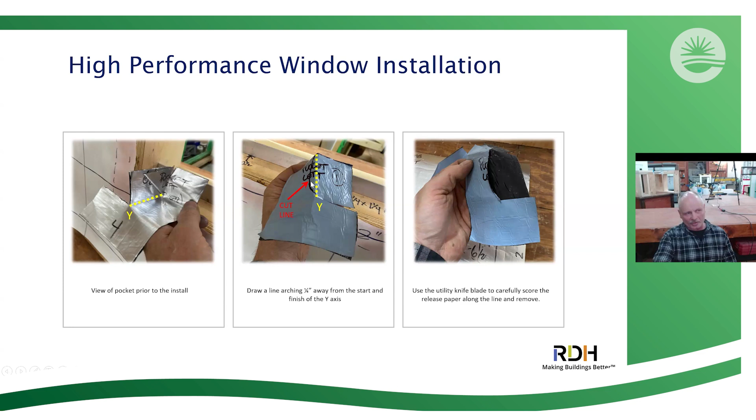So I want to set the Y-axis first, and I put the dog ear on the jamb. Dog licks the jam, so here's my Y-axis. I just score a little quarter inch beyond in a happy face - you're always happy, okay. And then I take this release off, I set that into the corner. I set the axes, and then I put it on the wall. If you seat the axes, the wall always falls into place.

I then reach behind, take the release, come and tuck it under plane number 3 here and stop. I expose the X-axis, I use my cool paddle. I set the axes and I put it on the wall. And then I take this tail and I just pull it out. And I set planes 3 and 4. I use the paddle to pinch seal the edges.

You see peel stick peels up - not enough attention is given. It's pressure sensitive, okay, so I just pinch the edge of it with the paddle. You can't get it off, it's amazing. Now you start with the gussets.

Okay, the gussets are how you seal that pinhole right here. Because I wrapped the jamb, but it's still got a pinhole right here. I need to run some membrane around it. So where do I get the gussets from? Well, I get it from the jamb piece.

So the Tyvek went 7 inches up, and the membrane lap is 2 inches. So all the jambs are 9 inches long. All the pockets are 4 inches wide. All the jams are 9 inches long. You can pre-make all of your papers if you know the rough opening of the window.

You don't have to do this on site. I've done this for builders numerous times - give me your rough opening cut list, and I can bring you the entire thing wrapped in a bundle, one for each window, and you install it. And all of a sudden, you don't have to know how to do it.

But if all the pieces are pre-cut for you, then you get osmotic learning. You just install it by the cut size, and you see with your hands how to do it. All of a sudden, anybody - and I've done this with secretaries - it doesn't matter if you're even in the trade. They come to workshops, we have team building events. Some firms find this fun, so I entertain them for a day. And I have the receptionists doing better jobs than some of the construction managers. It's just funny, but it's so simple. And they all learn it, and you never look at a window the same.

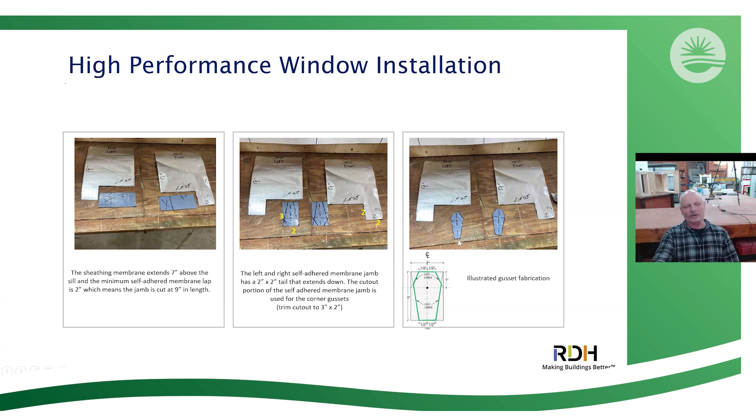So then I install this here, and I place it into there, and I project it out about an inch. Don't interfere with the dog ear in the corner. Do this side first, set your axes, do these inside first. Then take your thumb and just roll it back and forth, and you can mold it like that. Then I pinch seal it.

Here it is with install. I then take the jamb that I took the gusset from, and I put the angle in. I know that my angle is 2.5 inches back, so I can measure from this corner here, measure back 2.5. It's 1.75 inches high, and I cut out a 1/8 notch for the angle.

Simple. Once I pull that out, I can dry fit that notch onto the angle. I take the release from the top, take it down a couple inches, set this plane, pull the release off, lightly press it into place, roll around the corner, and push this side down. Once it's placed, then I rub it.

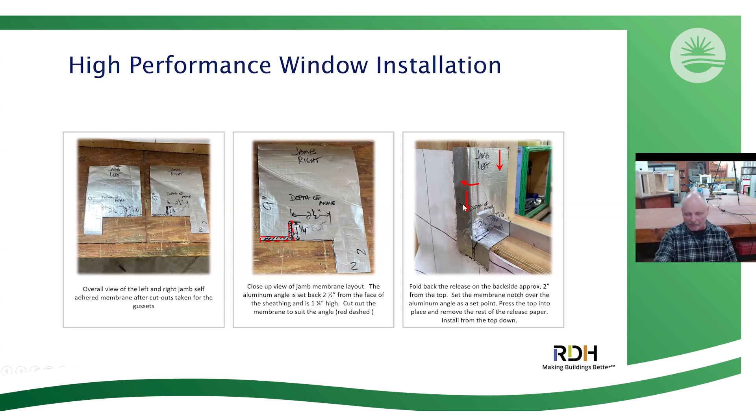Okay, you can see the dog ear in the background here. You can see the gusset, that's peel and stuck. Everything you put peel and stick on, what you put it on should transpose through. Otherwise, you've done peel and float. There's not supposed to be peel and float, it's peel and stuck.

So now that I got this on, I get the sill membrane on. So I'll take the sill membrane, I'll dry fit into place. So right here, it's dry fit, I got the release still on. The sill's all primed, you see that? All the laps of the peel stick are primed, but the release is still on.

I dry fit it with my paddle. I then lift up the front and tuck the release paper under the sill. Then I take the front, fold it down, and seat it off. Now that I've got the front done, I pull it back and take the release off, and then just roll it into place with my paddle, one plane at a time. And I end up with a perfect install.

You can see my laps, you see everything transposed through. The sill's done. This is the jamb membrane. It's going to come up 4 inches past the head, and everything extends 11 3/4.

The reason this is happening, think about that: I buy Tyvek or whatever I might buy, whether it's a 3-foot roll or a 9-foot roll, but I cut 18-inch, and if I'm doing exterior insulation, I cut 24-inch, and I call it a starter. In this case, I'm extending back 11 3/4 on each side. I have a 2x6 wall with 3/4 shear, that's 6 1/4. 6 1/4 plus 11 3/4 makes 18. So I know that my membrane, if I go to the full extent of the framing, will come out 11 3/4. I can mark that. So when I'm done, I have a picture frame and a purposeful install.

Does that matter? Yeah. I have worked on projects side by side, same builder, except one was for my colleague. He asked me to do all the strip in. I did. Everything was neat, tidy, and organized. And the house next door, Don Byler's, looked like it was done in a windstorm. And people would walk by and say, why does that house look so much better than that one? Well, that's a wonderful opportunity for building to explain, well, the reason it looks so much better and looks organized is because we actually have a plan. We do it for exterior air barrier, and you have this wonderful chance to express yourselves. And that's exactly what we did.

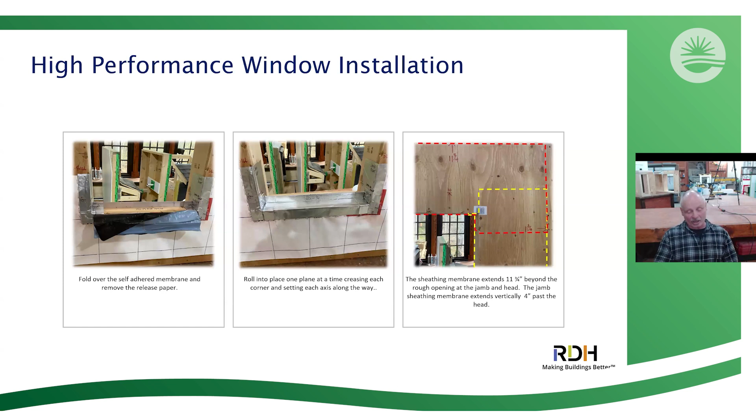So you can see here, the jamb extends 4 inches past. All the cuts are vertical, yep, vertical cut, and it flaps underneath. So it laps over here 4 inches, and it goes up here 4 inches. So for every window on exterior air barrier strip in, the length of the jamb paper is the rough opening plus 1 inch, that's it. I have a 48-inch high window, 49-inch jamb paper. 24-inch window, 25-inch jamb paper. None of this, it's about having a plan and a process.

How about the sill and head? It'll be the rough opening plus 11 3/4 times 2, because that's how much it extends on each side. So all I need is the rough opening, I'll tell you whatever you need to know. The pockets, the gussets, the jambs, the papers, all around with elastic band, plunked in front of the window. Go.

All the cuts are vertical. Do the head. Head extends up, same 11 3/4, okay? All the cuts are vertical, wraps to the underside.

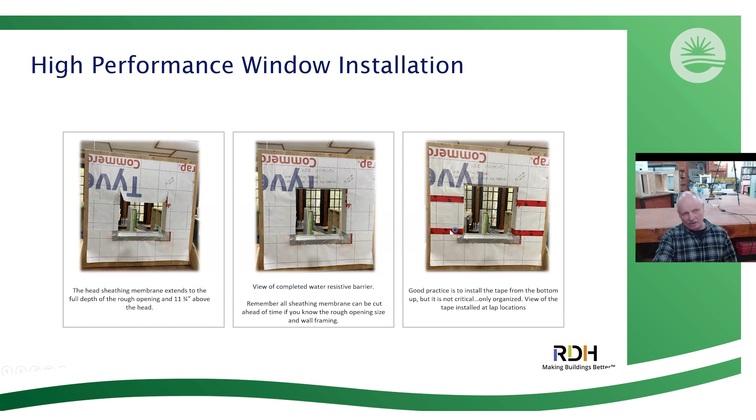Now you have a water-resistant barrier. All things are lapped, shingled, super. All right, now I'm going to tape all the laps to make it a water-resistant barrier and an air barrier. So I started that and I worked my way up from the bottom, just good habit.

And I come across here and I got a lap, and I got a joint right here at the inside corner. Well, I put a piece of tape there and I extend that tape out 1 inch and I roll it around as a tape gusset at this corner and this corner. But that will be a wrinkled tape gusset under stress.

So I take what's called a retention strip right here, and I put it over top of that gusset at the midpoint. I make a little slit right here, and I fold it around, and I wrap that corner. So you can see here, you got a nice tight double wrap corner, air barrier, good to go.

And here's what it should look like finished. Every window will look exactly like that on the entire project, and every single piece here can be pre-made if you know the rough opening. That's efficiency. Now you get into this.

Well, hang on a minute. Whoa, what are you doing? No, I'm going to put the insulation on. What about the window? I can do that later. Oh yeah, it's got no flanges.

Oh, life is good. Okay, so we get down to this stage here, okay, to say, well, I got plywood on the top. Well, I'm putting 2 inches on this here exercise for the carpentry students, okay? And so the head has got 1.5 inches plus half-inch plywood to make 2 inches. The reason I got plywood at the head is that's where I'm going to attach my flashings, etc.

And I'm going to do short screws up there. The plywood's done with long screws into the air barrier to pressure seal. You can see a different type of retention plate.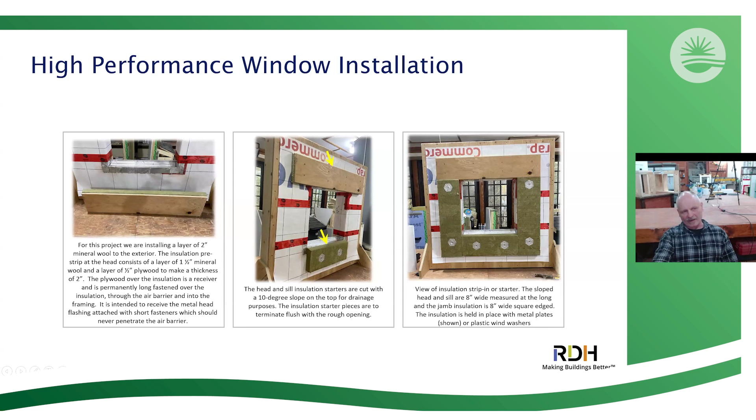Here I used a metal insulation plate. It's a roofing type plate. That's what I had. Don't really matter. Typically I use the plastic ones, unless I'm doing a fire rated wall assembly, then I use the metal ones.

So you start to look at here. This mineral wool itself is hydrophobic. Okay. I think everybody should know that. Let's see if I can express that for you,

which I will do with this piece of mineral wool right here.

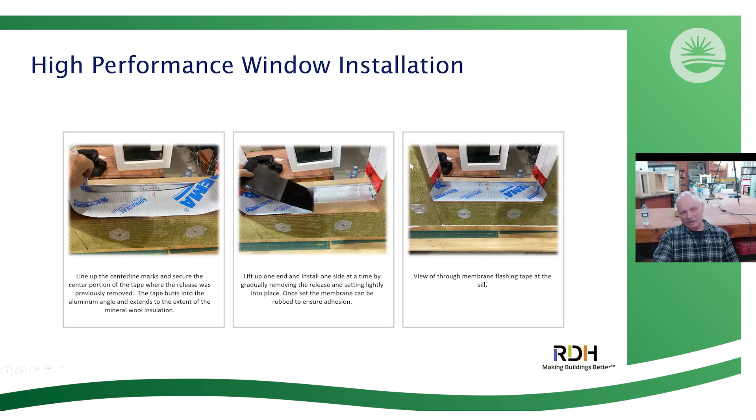So I score this membrane on the center line, and I mark the center line here so that when I go to install this, I can line up my center lines, fold it back, and do one side at a time and then the other side. Now I've got a pan that directs water out of the insulation, and it's simply a water resistant barrier, nothing to do with my air barrier, okay?

I start to look at this here, so let me see, what have I done? I've put in an air barrier and water resistant barrier starter onto the sheathing, and then I put an insulation starter on top of that, and I still haven't done the window.

If I know the rough opening, can I cut the insulation starters just like I did with the paper? Short answer, absolutely. Of course I can. The sill is equal to the rough opening, okay? The head is equal to the rough opening plus 16, because each of my starters here are 8 inches. I put a 10-degree slope on the top and a 10-degree slope at the sill. So I can rip all these at the shop. I can buck them into length, bundle them, and call it by window title. You're ready to go. That's pretty efficient.

So let's look at a flangeless window. You want to make sure you get the windows in the right orientation. I've seen upside down windows, backwards windows, all kinds of stuff, but they've got weep holes, okay? So put the weep hole to the outside on the bottom. But sometimes they've got a hole here — it's a hole to equalize the pressure in the frame, okay? And don't put that on the bottom because we could direct water entry, right?

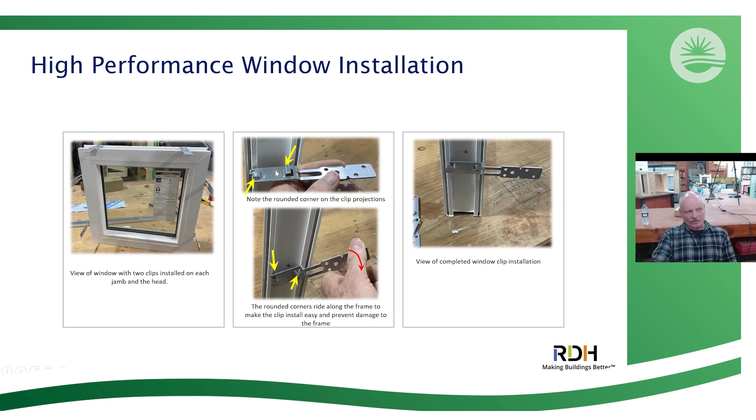Kind of straightforward. The interesting thing about the clips going on, many of these clips are designed to clip into a chase. They'll have rounded edges, and you want to put the rounded edges against the frame and rotate it in, because if you put the square sharp edges in, you're going to puncture the frame. So here's an insulation clip, okay?

On my sill, I use my shim stacks, horseshoe shims. I take tuck tape, cut it in half, 1 inch wide, and wrap each stack, put a daub of sealant, put it in the corners. Helps me stay there because these windows are heavy, and I don't want these things misbehaving. I want them to stay still.

So I'll drop the window into place. Once I've got the window in place, you can see the clips holding the window from the back side here. And when I put this in, you can see this sealant along the top of the angle — that's the air seal for the window to the aluminum angle. I've also put sealant on the top of this membrane, and along the joint of that membrane here.

Why? Because I had a caulking gun in my hand. Do I have to? No. But this is about best practice, okay? And I have a gun in my hand, and it doesn't have to be pretty, okay? I'm just locking everything down, okay?

So now you can see I'm ready to install the window. I put it on the shims, I push it in, you get the sealant bleed out here, and you go, well, that's a mess. Well, fortunately, there's cool tooling sticks shaped very much like a chisel end, almost like a half-inch chisel. You turn it and do like a grater, run it along, and it cleans it right off, clean as a whistle. Then you go the other side, clean it right off, clean as a whistle. Do it when it's wet — any residual left behind will rub off during the construction clean at the end, okay?

So there's no excuse. Here's a very, very important point that gets missed all the time, and this is what I check when I'm doing field testing on site, rainwater testing, or air leakage testing: these clips. You need to seal behind the clip as well as over the clip, to make a transition from the paper to the window, okay?

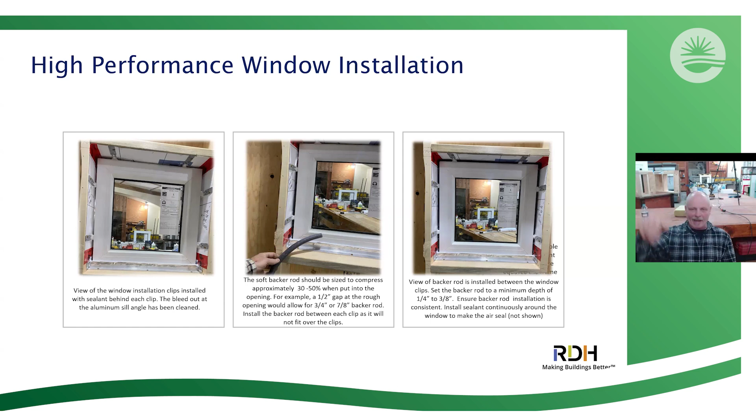For fenestration, windows and doors, the air seal goes on the inside, full stop. None of this outside madness and all the talking about it—that's not where it goes.

You can see now I'm going to start putting straps on. I set my straps here—I've got a 4.5 inch line. Without getting into the nitty gritty, I've set where this line across the top is, where my head flashing will go, and the back leg of my head flashing will terminate at the top of my plywood receiver to receive membrane. So I'm putting all my straps on and they all line up at the same height, because that's where the head flash is going to go. Once you establish that, it's quite simple.

Now, I have my inner jamb flashing stop a half inch from here, so I get drainage right here. You can see in my sill straps, I have drainage at this corner and drainage at this corner—that's where water comes out of windows, doesn't come out everywhere else, just comes out in the corners. So let them be free draining.

But I also have a window, which is my thermal component, and a wall with insulation on it—insulation inside the wall too—but there's a gap around it for the rough opening. So how do I make it thermally continuous? Well, I use what I call banana bread. When I say banana bread, I mean I take mineral wool batt and slice it, and it falls over and kind of looks like banana bread.

So I'll take that, about 1.5 inches wide and about 5/8 thick, and stuff it between the window. The reason the rough opening is there is so you have some ability for movement, without transferring the forces to the window. If you take a 5/8 slat of mineral wool and push on it, it's super soft—yet when I stuff it into that opening, the window can still rack and I'm thermally continuous.

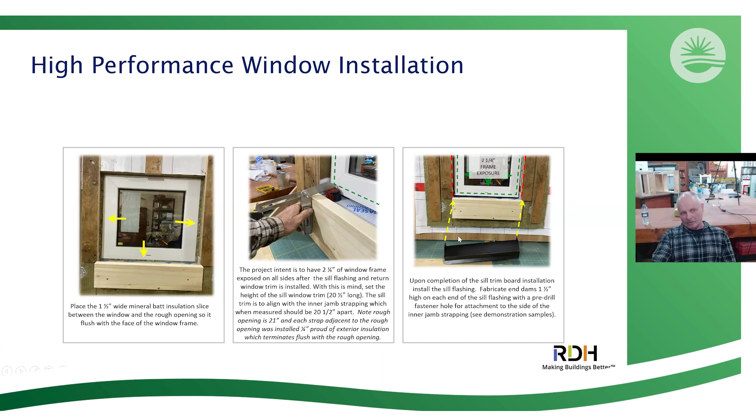So I put my sill flashing on here with end dams, which I make 1.5 inches high. That's what they look like. I fold them up and then fold it back on itself, so that I have an angle that will sleeve behind.

You see how the trim board will slide down on the strapping, and I back cut it so it goes over top of the end dam and you never see it. It looks neat and tidy because I put a kerf in the backside. Just a picture of the end dam and the rest of it. You can see now the sill flash is installed. There's the weep hole for the window, and I've got a starting point.

So now I'm going to put my trims, return trims get attached to the side of the straps, right here. Here's my board, my trim board notching around here, so I have a 1/8 offset right here. I've notched this out 1 inch of my jamb coming down.

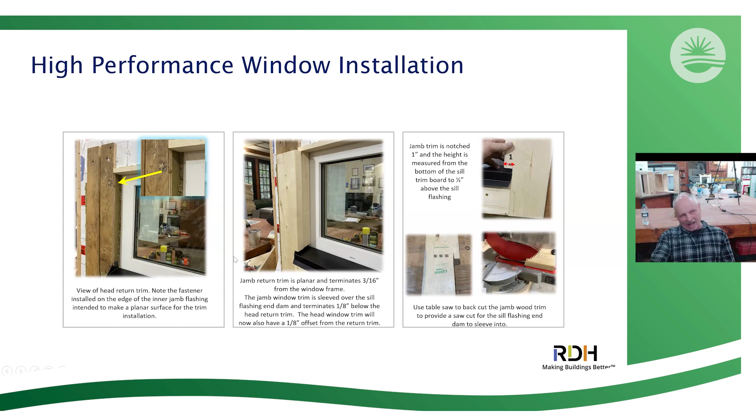And then on the back side, you see the saw cut? Just like that. So when I do that, that little saw cut sleeves into that little end dam, and you don't have this looks-like-somebody-beat-it-with-a-beaver look. It looks neat and tidy. I've seen some ugly sill jamb interfaces. It should look neat and tidy and follow the angle of your sill, 10 degrees, set it at 10 degrees, good to go.

So you start to look at that. Here's all the wood trim installed around the window. And I knew that worked because if I'm going to set this height and I've got this data point height here, I know that my head is going to be 1/8 lower than this. So I can measure from here to here. I know the jamb size. I know everything, and I can give you all of these wood pieces from home from the rough opening.

All of it stems from the only known data point, the rough opening. If you internalize something to this level, you can pre-cut all this. All the trims have a 3/4 by 3/4 dado or whatever I need to suit a rabbet joint for my cladding, so my cladding will tuck in behind it, neat and tidy.

Now I'm going to make the head flashing. I just drew this here, make a 1-inch end dam, put a safety edge on here, fold it up. Now you have an end dam. Really simple to do. Place that on top of the plywood receiver and it gets fastened there. Pretty simple. So the previous line from the rough opening was 4.5, that's where that flashing goes, but I've got to put a membrane on top of here.

You see the primer again, just like the sill. I take this here and I could score this membrane and do whatever I like. So this 2 inches here is going to go on the Tyvek, this 2 inches here is going to go on the top of the mineral wool, and this 1 inch here is going to go over the flashing back leg.

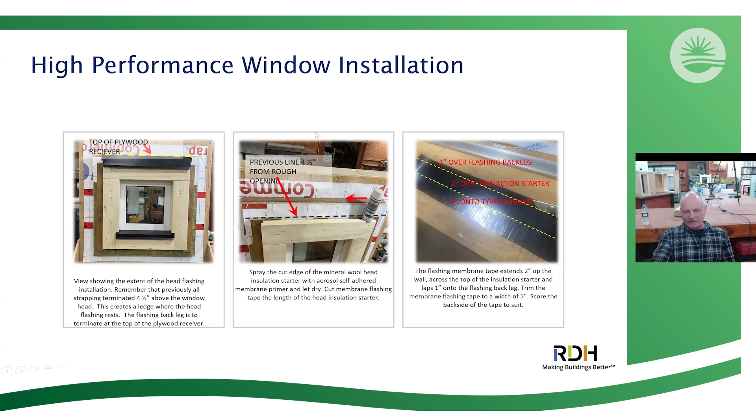But I'm not going to remove this release paper. I'm going to leave this one on and it's going to lap over my flashing because it's only a water resistant barrier, I don't need to stick it to the flashing. So if I ever want to change my flashing, I can just lift it off, put a new one on, and fold it back over again. If I have time, I got one behind me, I'll take it apart and show you.

So you're installing this tape, it's the same idea, one plane at a time. You see it go along, press it all in there with your paddle lightly. This is a supple membrane. First you seat it, then you beat it, okay? So seat it nicely, and then you can rub it into place.

And so now you see that this is getting set up. I dropped the flashing on there. I carried my water resistant barrier and air barrier from the wall, and I lapped it over top, so everything's shingled. I'm shingled at the insulation layer, I'm shingled at the back layer.

Now I might have a windy site. This is my stinger, and what it is basically a hammer tacker that shoots out 1-inch staple, cap staples. I just whack that into place. So if I don't want the thing to blow away, if I got that kind of site, or that type of year, it's a shoulder season and it's windy, I don't have to worry about it because these type of staples will still keep it airtight.

You just don't staple in the field, the standard staple, when you're doing exterior air barrier. Only staple where you're going to lap and tape, okay?

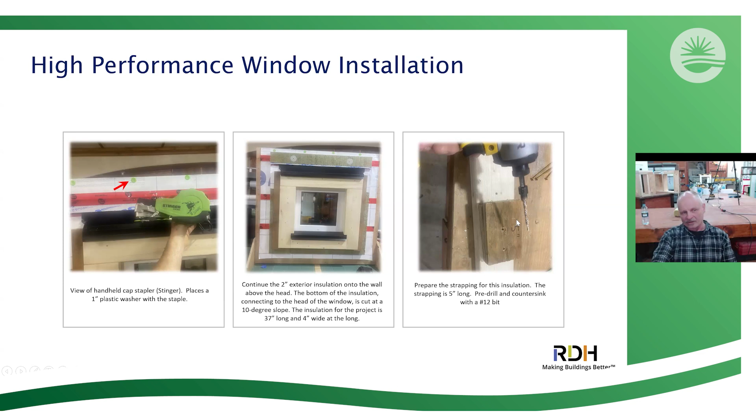So now I put the insulation on, so I'd be carrying off the wall. I just put a strip because I ran out of mock-up, but I'd be carrying up the wall. I'm showing a countersink bit here and the little strap that I'm going to put above there, a 5-inch strap in this case. I just pre-drill the countersink so that the fasteners go right into there.

This here, I've given you a link. You go to this link and you can go to the local energy efficiency partnerships, we wrote all this literature for them. This shows you the various weights of typical type claddings.

Stucco, stucco is 10 to 12 pounds a square foot. That's like a little bag of sugar, right? You're like, oh, is that all? Well, it's not crazy, right? So this whole exterior insulation thing is not a problem whatsoever.

Here's some suggested lightweight, medium, heavy fastener strapping. This is when you go into the studs, you see on the graphic, right? That can be very challenging to do.

There's also, if you download this guide or go look at it, it'll give you some notes so that you can do the same thing with 3/4 sheathing. So I look at it this way: if I have 4-inch insulation, I use 6-inch fasteners with 3/4 straps; 2-inch, I use 4-inch fasteners. So my fasteners are always 2 inches longer than my insulation.

There's nothing to think about because it goes through the 3/4 strap, through, for example, 4 inches of insulation, then 3/4 sheathing. I'm already at 5.5, so the maximum I can penetrate into my wall cavity is a 1/2 inch, which works for missing electricals, all the other type of lights, which should not be there, and you're allowed that.

You can look here, that's what we had for roof to wall. We got air seal on top of the plates. Here we got the full window done. The wall's not done, vented roof, flangeless window.

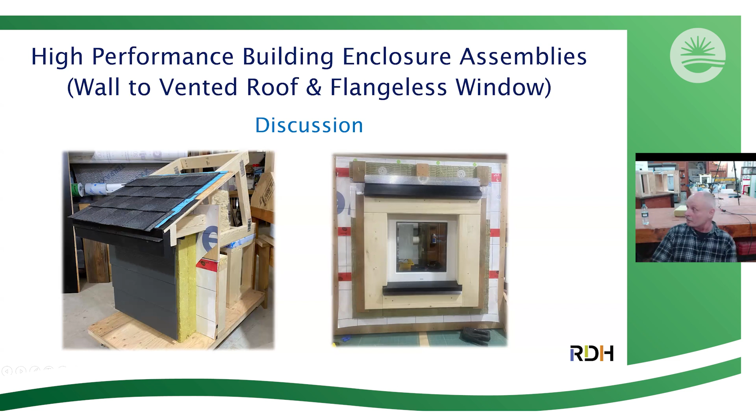Someone noted they've seen a large number of builders do negative laps for their flashing and rely on high performance tape, with the building wrap on the back side of the flashings. They understand this is a direct violation of code. Are they missing anything, or is this an acceptable practice?

I'll give you the straight answer, it's how I'm wired. It doesn't comply with the building code, but I can tell you categorically that if you exterior insulate your wall assemblies, I've tested them for years, class after class, with students and first timers. I test them to 9,000 pascals, 441 kilometer-hour winds, and with a rain rack, the 1105 standard on steroids. In all the years I've done a test, I've yet to ever see a drop of water on the Tyvek.

I also do training with building officials, and I have this discussion with them, and they keep reverting back to the notes section of Part 9 that shows a little 50 millimeter lap over the back leg of the flashing. Well, first off, the flashing isn't at that plane anymore, it's out on the insulation. That membrane isn't metal, it's a membrane, so no water can ever get there. And if it did, you've already got a continuous water and air barrier plane all the way down the assembly, so it becomes unnecessary. What I find most unnecessary is wasting time discussing it with an official who's inspecting - just plan to lap it. But technically, it's no big deal.

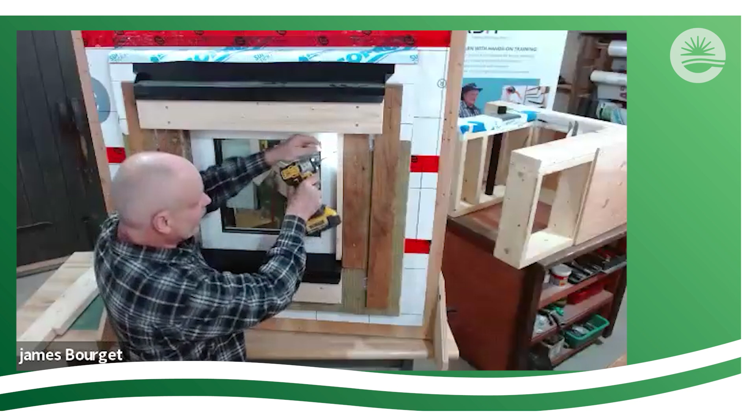This strapping here is actually set 1/4 inch proud of the insulation. So when I mount my trim, I have a drainage space all the way down. It lands on the sill under here where I had that pan membrane I showed you, and then drains out. So I have rain screen on all sides.

Same with the head. The head sits down, any water would come along, down and out. It's fully drained. You can see the flashing of the sill is attached to the side here with a pan screw, and I put another pan screw up here so that when I put the trim on, it sits planar. You see the same gap all the way along because the end dam takes up a bit of space. So I put a screw right here, and it's a leveling screw. It allows this to go on.

All the trim everywhere has a gap for sealing, all the way around. So by part 9, you need to caulk between the window and your cladding. So I leave a gap this way and I seal this way, this way, and this way, so when you're looking at it, you don't see it. Then I have a 1/4 inch, which gives me enough for 1/4 by 1/4, a 1-to-1 ratio, allowable by way of seal profile for durability.